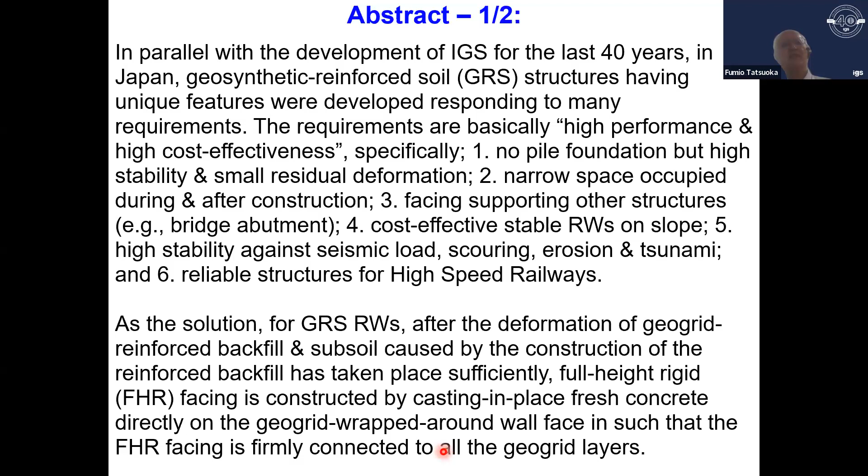Directly on the grid wrapped around the wall face, such that the rigid facing is firmly connected to all the grid layers. In the early 1990s, GRS bridge abutment was developed. One end of a simple girder is supported by a fixed bearing arranged at the top of the rigid facing of a GRS wall, or both ends of a simple girder are supported by fixed and movable bearings at the top of the rigid facing of a pair of GRS retaining walls. In total, 185 have been constructed.

Then GRS integral bridge was developed. Both ends of the continuous girder are structurally integrated to the top of the rigid facing of a pair of GRS retaining walls at the last stage of construction. 14 have been constructed. In the meantime, a number of embankments and conventional type retaining walls and bridges that collapsed due to severe seismic load, scouring, erosion, or tsunami were reconstructed as these GRS structures. After 40 years, the total wall length exceeded 200 kilometers.

Many GRS structures were constructed for high-speed railways. All of them have been performing very well, with no problematic case during and after construction, while very high cost effectiveness with low maintenance costs has been validated.

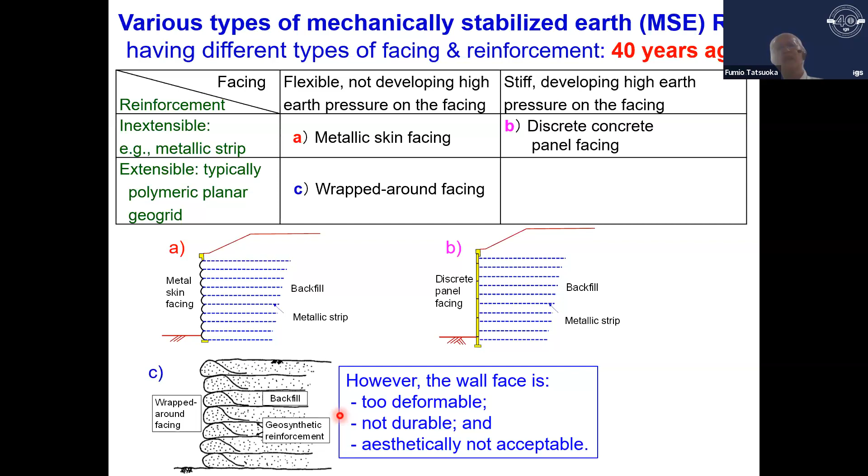This changed, moving to a discrete panel facing like this. Then with geogrid, we constructed a wrap around facing like this. However, the wall face is too deformable, not durable, and aesthetically not acceptable. So we moved to this modular block facing. This is a substantial improvement.

Yet further developments were necessary to respond to many requirements and requests. We have to go to the next step. So these are a number of problems with conventional type retaining walls: basically low performance and low cost effectiveness.

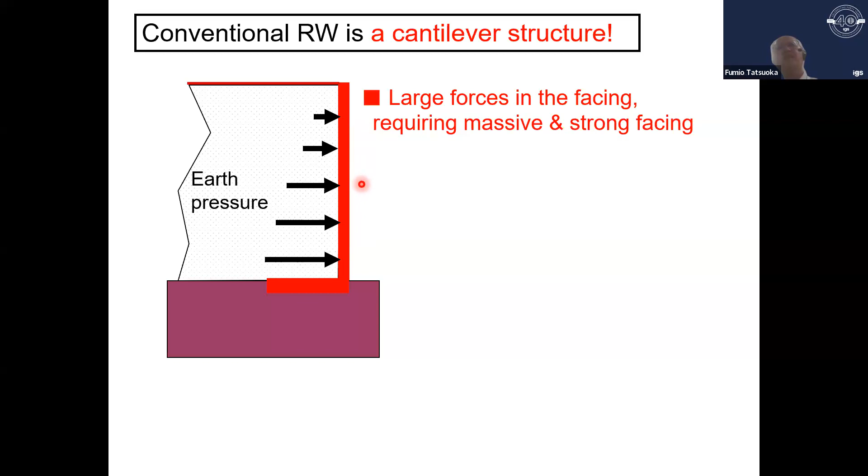Specifically, the first problem is the need for a costly pile foundation to ensure sufficient stability. This is because conventional retaining walls are cantilever structures, so we have large forces in the facing requiring a massive and strong facing, a large overturning moment, and large lateral thrust load at the facing base. This results in unstable behavior, particularly under severe seismic loads, with large stress concentration at the facing base, so usually we need a costly pile foundation.

This is one example in Japan. This is very soft clay, very thick, so we need a retaining wall. When we construct a cantilever retaining wall, we need a very long pile, but this is utterly not cost effective.

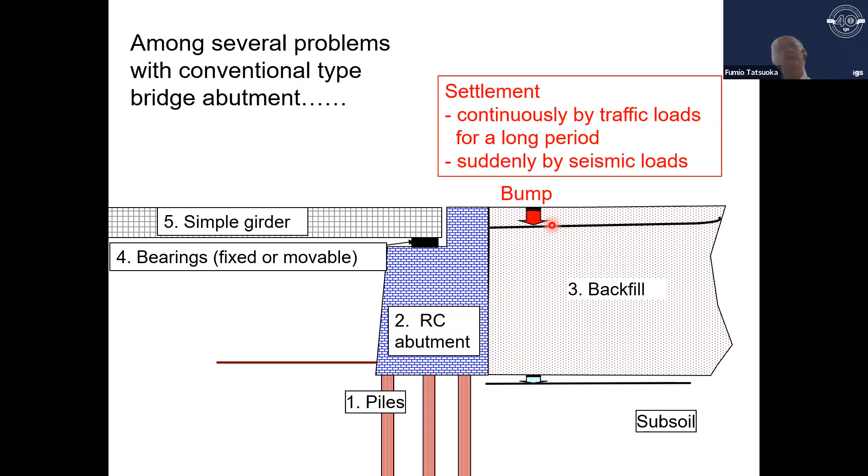The second problem is that we may have too large post-construction deformation settlement. So we have many problems with conventional type bridge abutment. One problem is the bump caused by continuous settlement. This may take place continuously due to traffic loads over a long period, or suddenly due to a seismic load. This is a bump caused by a seismic load.

You can see there's a settlement in the backfill. We have numerous similar cases. This is another case from the January 17, 1995 Kobe earthquake. So here's the railway, and you can see a settlement here, creating a bump.

Furthermore, Japan is congested and narrow, with frequent severe natural disasters and a strong need for renewal of many old soil structures. So the following problems should also be solved. The third one is narrow space available during and after construction.

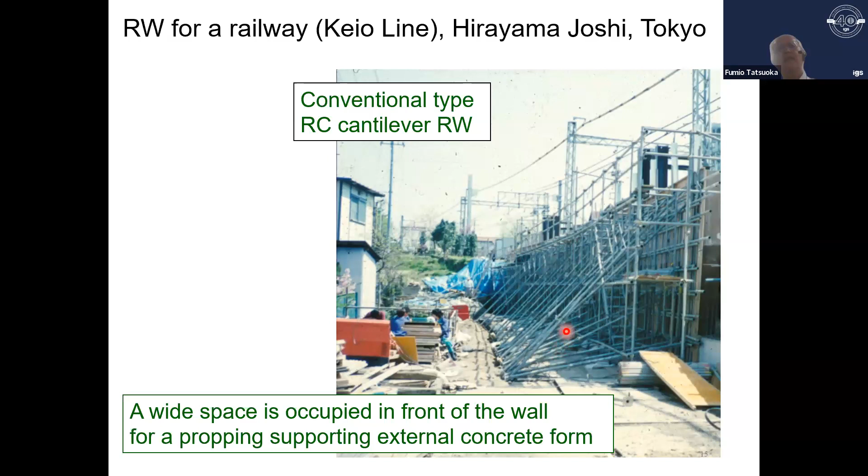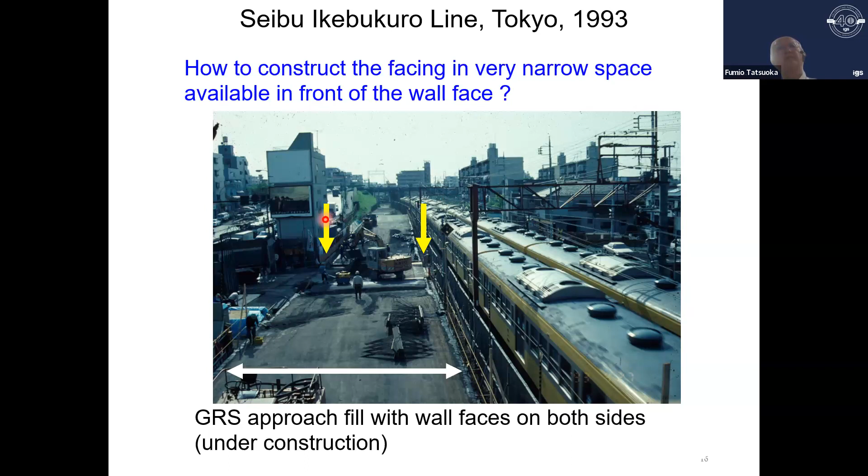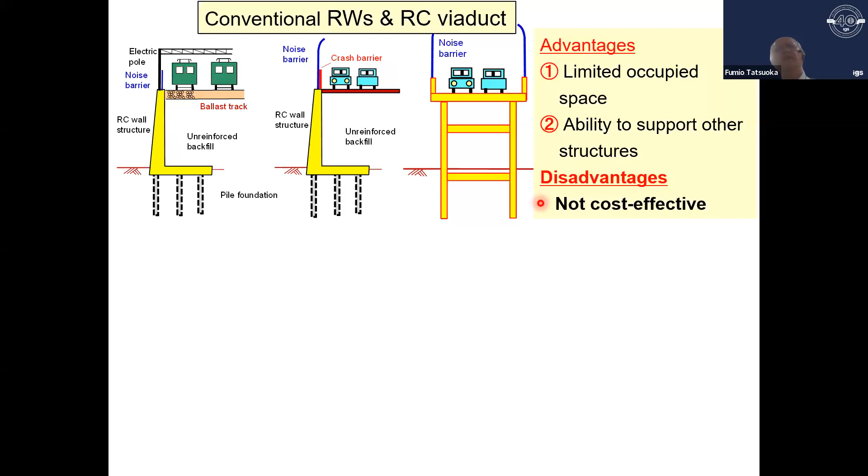So this shows a number of serious problems with conventional type bridge abutment. First, we construct many piles, then a massive RC abutment, then we construct the backfill, then earth pressure and settlement and lateral flow of the subsoil occur due to construction of the massive backfill. We may have negative friction or bending moment of the piles. And we place bearings, fixed or movable, which is costly for construction and also for long-term maintenance.

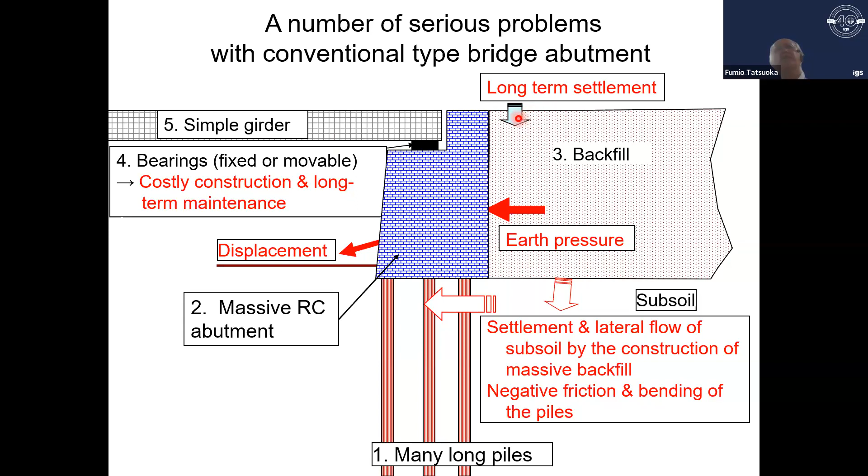Then we place a simple girder, and then we have long-term settlement. In general, we can say this is low performance and cost ineffective.

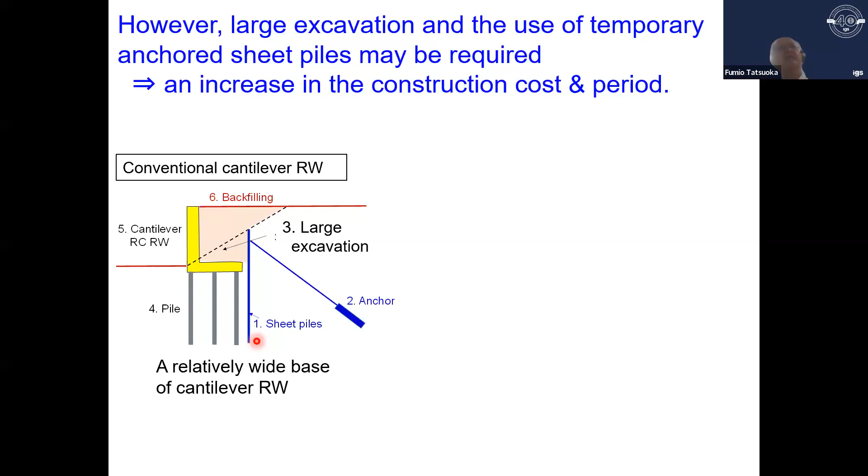The fifth problem is cost-ineffective construction of a stable retaining wall on a slope. So we need a vertical wall in this case to widen the crest of the embankment without occupying the space in front of it. However, with a conventional cantilever retaining wall, we need a large excavation and the use of a temporary anchored sheet pile. This will result in an increase in construction cost and period.

When we construct an MSE retaining wall having a facing of discrete panel or modular block, this is more cost effective, but their grid length to wall height ratio is usually larger than 0.7, or 70%, for sufficient wall stability. Then we may need a large excavation. So we have a number of similar cases.

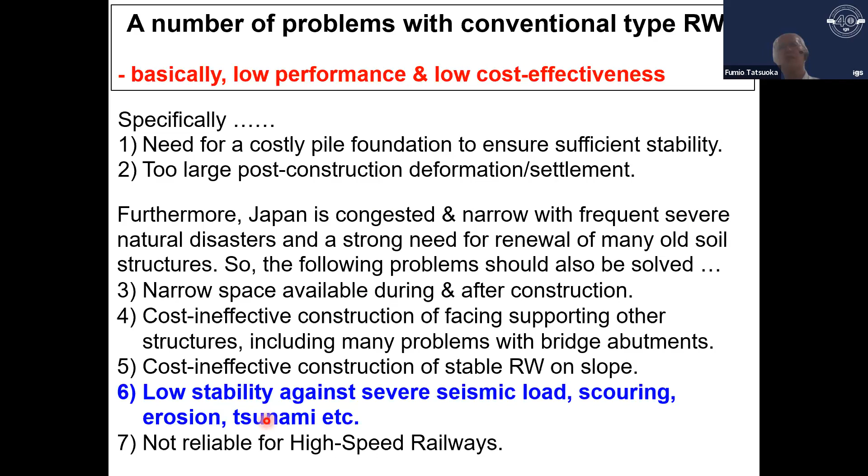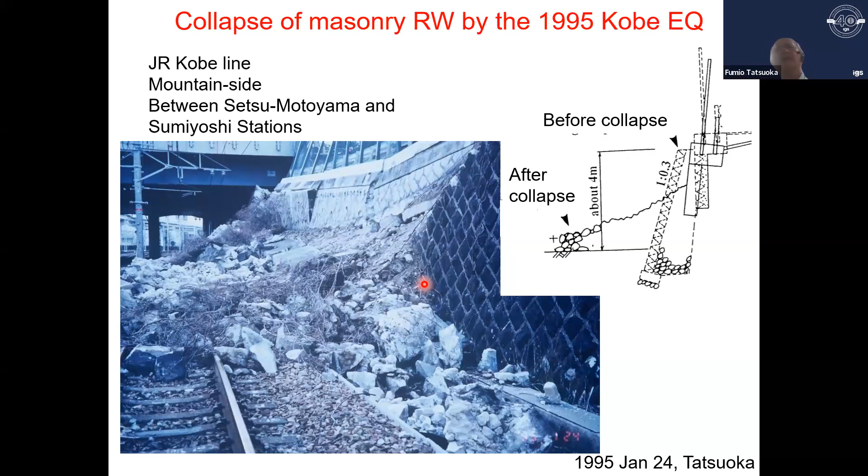This is the collapse of another type of gravity type retaining wall. So overturning failure took place despite a seismic design being performed using KH=0.2 with an allowable lower limit safety factor equal to 1.5. This means conventional seismic design is not sufficient. We also need a more stable wall.

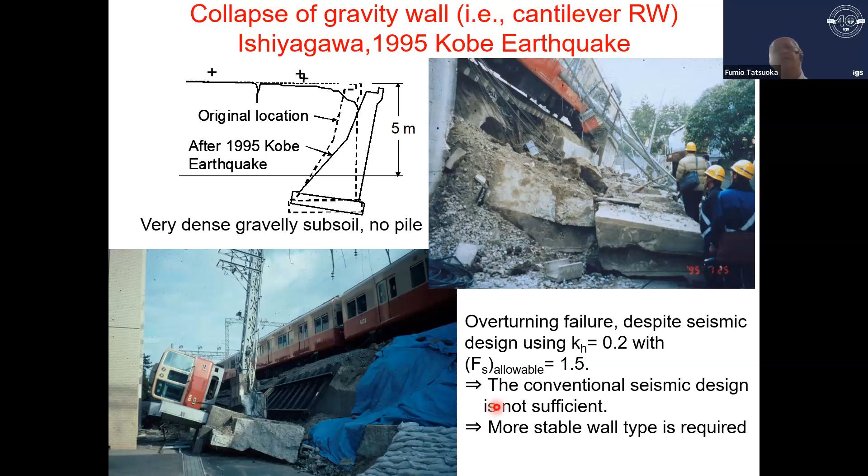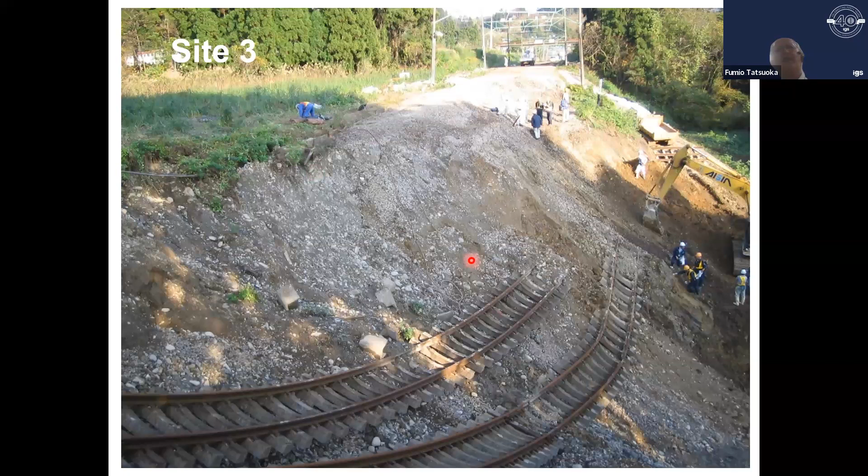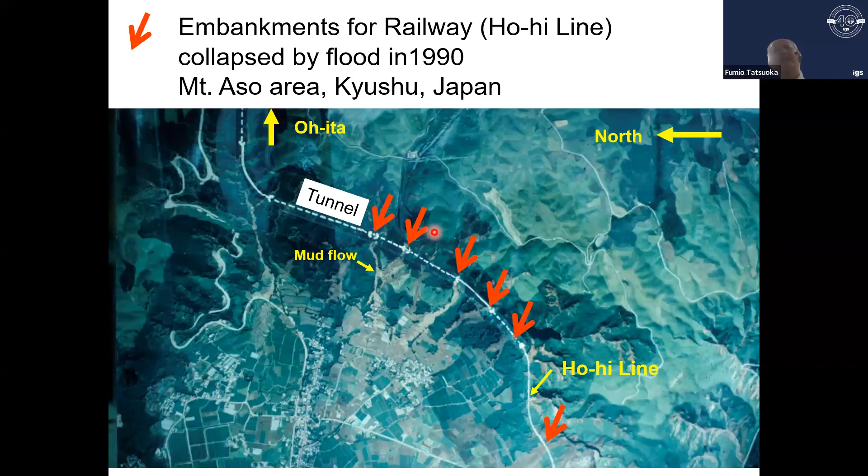So this is showing a railway in the mountain area; broken lines are tunnels, and the red arrow means the embankment for the railway. This collapsed by floods in 1990, like this. Here's a tunnel, and the embankment totally disappeared. A small diameter drain pipe was crossing the embankment. This was clogged by flowing timbers. Then a natural reservoir was formed. Then the embankment was fully eroded by overtopping flood. And here's a view of this tunnel exit on the right side and left side.

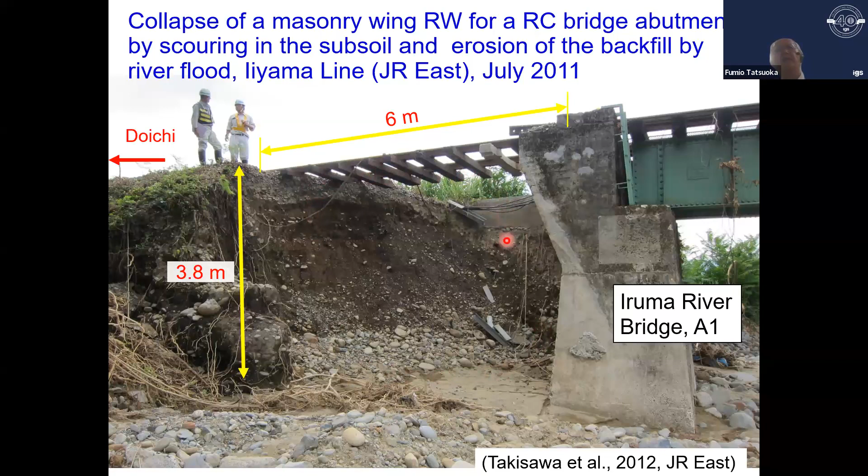This is a typical case, collapse of a gravity-type sea wall for a length of 1.5 kilometers by ocean waves during a storm in 2007, close to Tokyo. In front of the wall, about a 100 meter wide sand beach disappeared due to erosion by coastal current during the last 60 years since the completion of this road, which resulted in frequent direct attack of storm ocean waves to the wall.

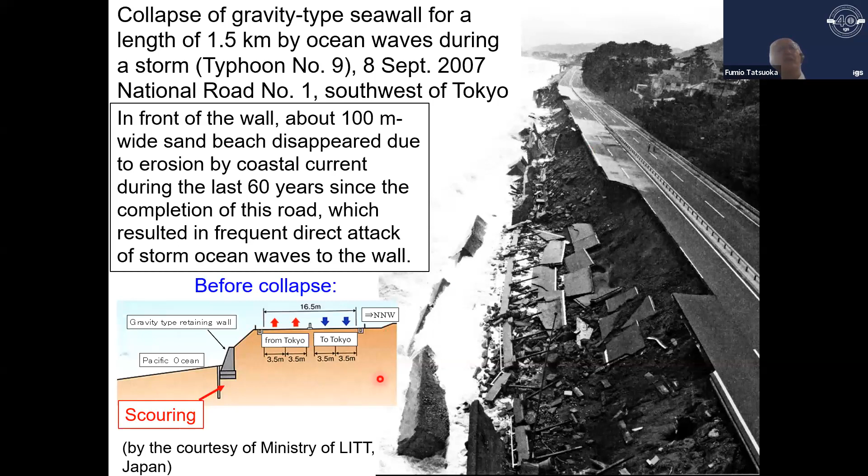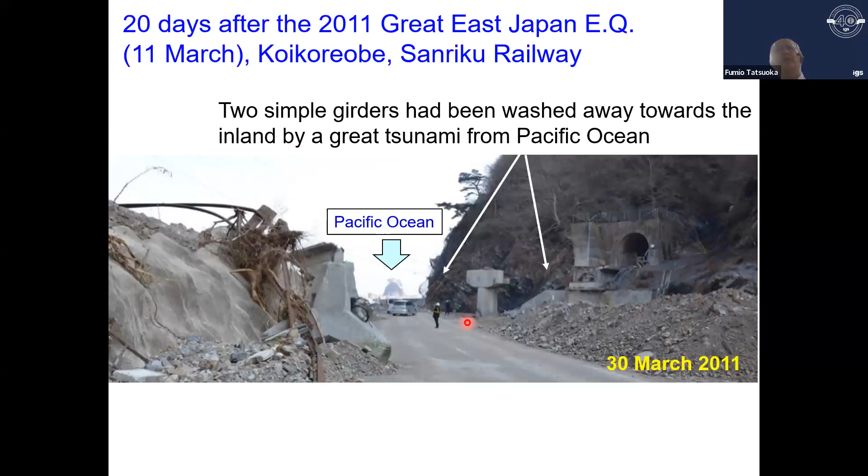So this is during the same earthquake, here in the Pacific Ocean; two simple girders have been washed away toward inland by a great tsunami from the Pacific Ocean. So as a result, these structures are not reliable for high-speed railways. So for the last 40 years, continuous efforts were made to develop the GRS structure that can alleviate these problems.

The solution is by three technical breakthroughs. First is the use of full-height rigid facing, for a change from a low earth pressure to high earth pressure on the facing, and from the facing as a secondary non-structural component to the facing as a primary structural component.

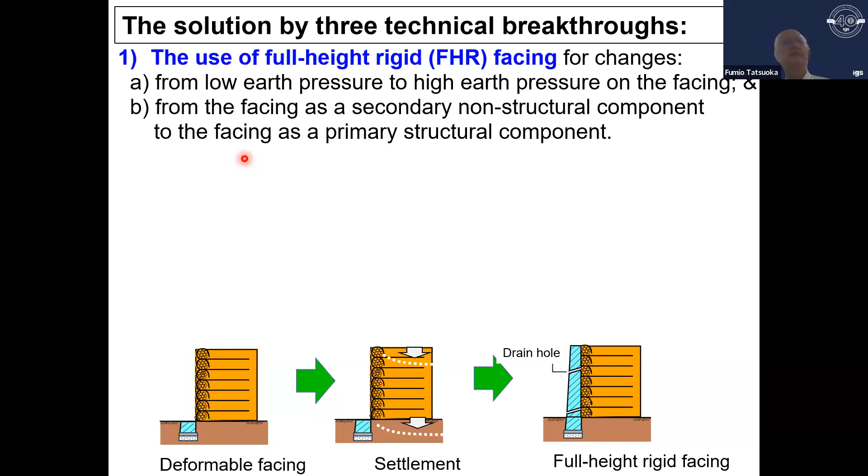Second is the structural integration of the full-height facing to the reinforced backfill, and the girder to a full-height rigid facing, with GRS integral bridge. For a change from a statically determinate but unstable structure to a statically indeterminate but stable structure.

Third is staged construction like this, for a change of construction sequence from the facing before the backfill to the facing after the backfill. So then we reached this full-height rigid facing after 40 years. So why is this solution relevant? Some reasons. So I will explain this in two terms.

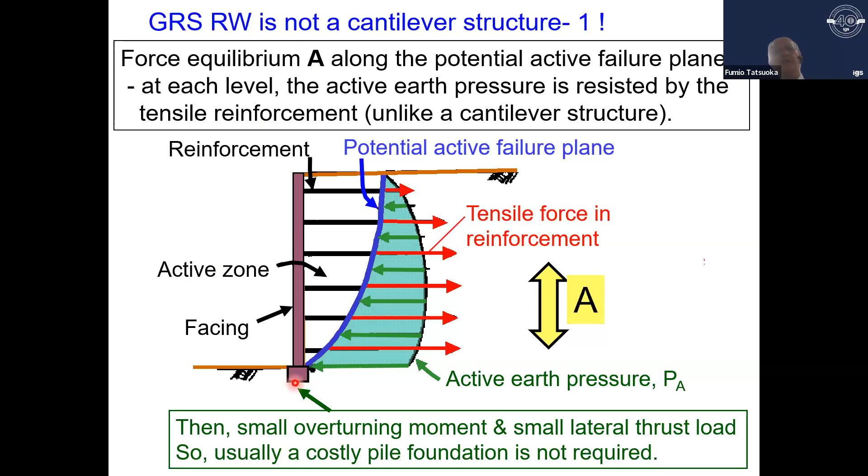So a GRS retaining wall is not a cantilever structure. So force equilibrium along the potential active failure plane is important. At each level, active earth pressure is resisted by the tensile reinforcement. This is unlike a cantilever structure. Therefore, a small overturning moment and a small lateral thrust load. So usually a costly pile foundation is not required.

However, when the facing is flexible, we have a very low earth pressure on the facing, which results in low tensile forces in the reinforcement, in particular at low levels. In the active zone, we have low confining pressure, therefore low strength and stiffness of the backfill, so large wall deformation and low stability of the wall.

On the other hand, when the facing is firmly connected to the reinforcement, we have a high earth pressure on the facing, which results in high tensile forces in the reinforcement, even at low levels. Then in the active zone, high confining pressure and therefore high strength and stiffness of the backfill. So we have a small wall deformation and high stability of the wall, even immediately behind the facing. Right?

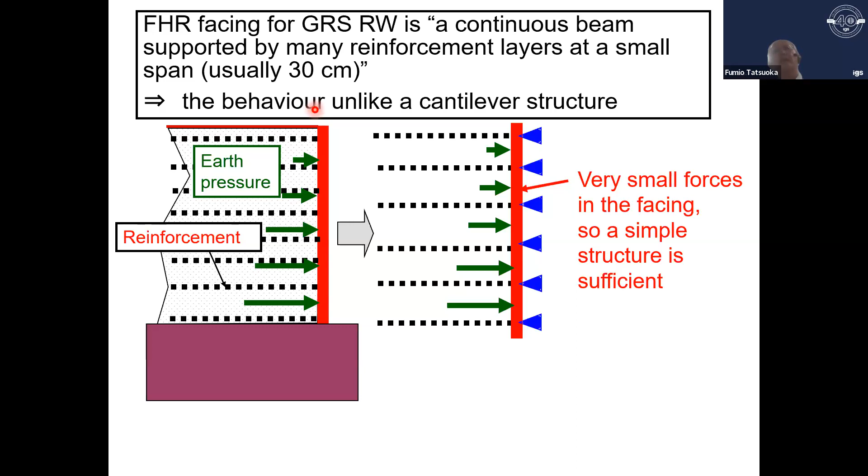So the full-height facing for a GRS retaining wall is actually a continuous beam supported by many reinforcement layers at a small span, usually 30 centimeters. The behavior becomes unlike a cantilever structure. There is a small force in the facing and a small overturning moment and small lateral thrust load at the facing base. So a pile foundation is not required and the wall becomes stable even against severe seismic loads.

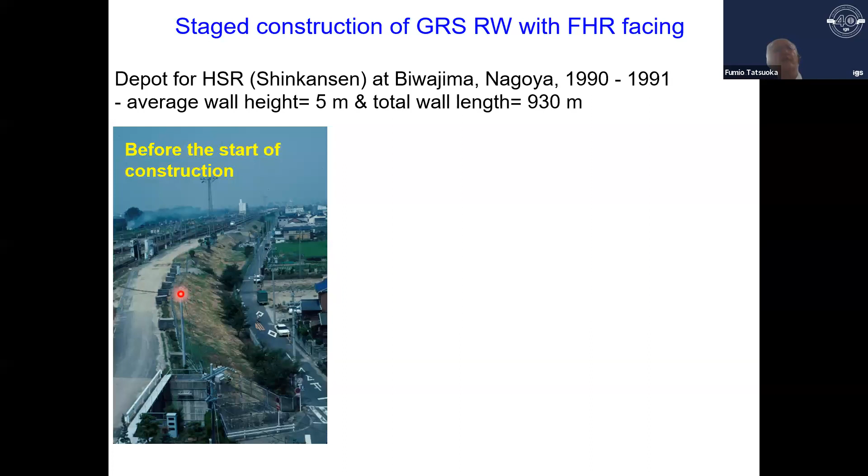So the third point is the staged construction. This is showing before the construction, the reconstruction of the slope face. This is the complete GRS wall, but before the construction of the full-height rigid facing. And this is the completed GRS wall after construction of the full-height rigid facing. This is the typical case. So in staged construction, first is the start of construction.

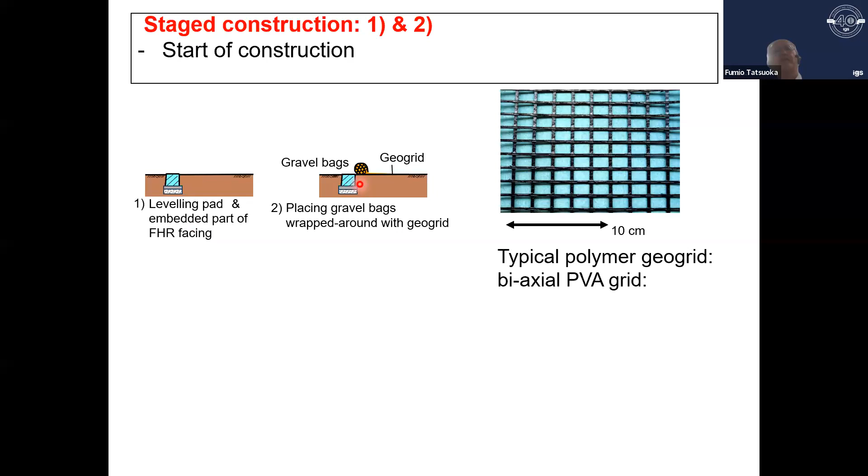Here the leveling pad and embedded part of the full-height rigid facing, and placing gabions, gravel bags wrapped around with the grid, and compaction of the first layer. Good compaction of the backfill is achieved by a small lift, 15 centimeters, ensured by a small vertical spacing, 30 centimeters, and no rigid facing existing during compaction. Besides, a small vertical spacing, 30 centimeters, results in a large contact area between the grid and backfill, and then high stability of the reinforced backfill as a composite.

Then this is the completed GRS wall, but before construction of the full-height rigid facing. Then, after compression of the backfill and subsoil has taken place sufficiently, the full-height rigid facing is constructed by casting in place fresh concrete directly on the grid-wrapped wall face. So fresh concrete enters the gravel-filled bags through the apertures of the wrapping grid. As a result, the full-height rigid facing is firmly connected to the grid layers.

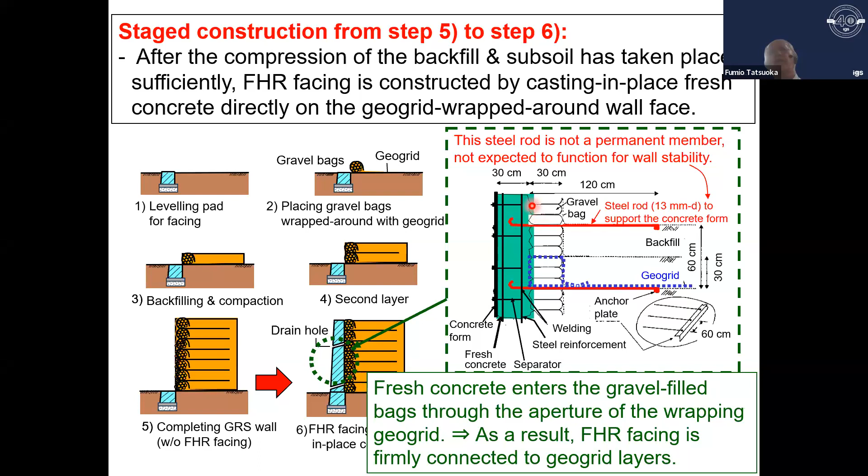So the properties required for the grid are: first, sufficient strength and stiffness with low creep deformation, and limited damage during backfill compaction; high anchorage strength in concrete and backfill, and good adhesiveness with concrete; and fourth, high long-term resistance against the high pH of concrete. Third and fourth are particularly important as the grid is in direct contact with fresh concrete like this.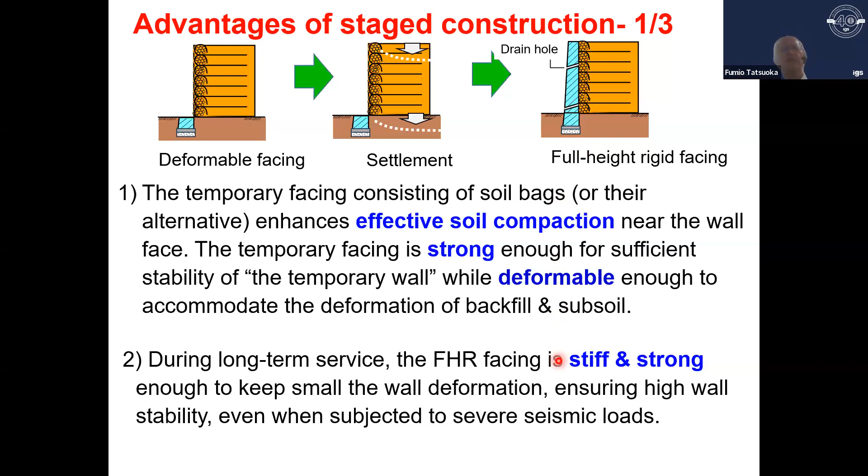And during long-term service, the full-height rigid facing is stiff and strong enough to keep the wall deformation small, ensuring high wall stability even when subjected to severe earthquake loads. And essentially no damage to the facing and the grid connection occurs during long-term service and against severe earthquake loads, because the post-construction differential settlement between the full-height rigid facing and backfill is essentially zero, and the gravel bags protect the facing-grid connection.

The last point is that the potential deformation of the backfill and subsoil has taken place before the construction of the full-height rigid facing. So a pile foundation to restrain the displacement of the facing becomes unnecessary. So when we use this GRS retaining wall at a bridge abutment, the residual displacement of the bridge girder supported by the GRS bridge abutment is kept very small despite no use of a pile foundation. I will explain this point later in detail.

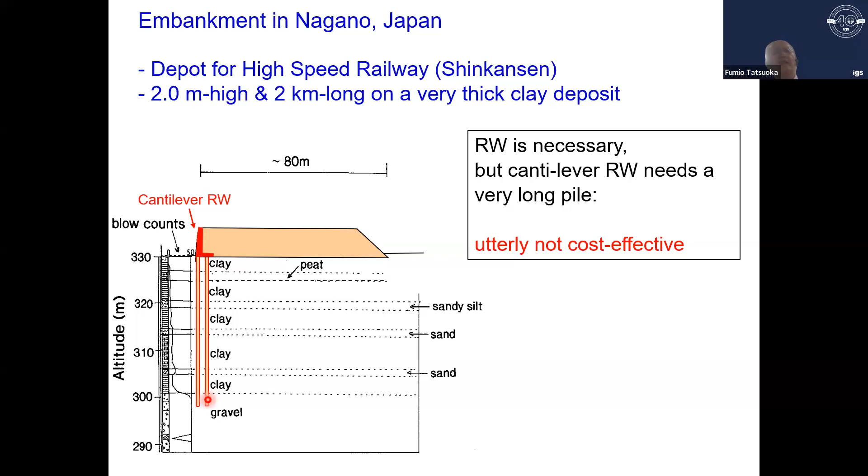So now this is an advantageous feature of GRS structures having staged-construction full-height rigid facing that alleviates many problems, for higher performance and higher cost effectiveness: first, high stability despite no use of a pile foundation, and very small post-construction deformation and settlement. In this case, for the conventional cantilever retaining wall, we need long piles. But this problem is overcome by staged construction of a GRS retaining wall without facing first, then preloading with settlement of about 1 meter, removal of the preload, then construction of the full-height rigid facing.

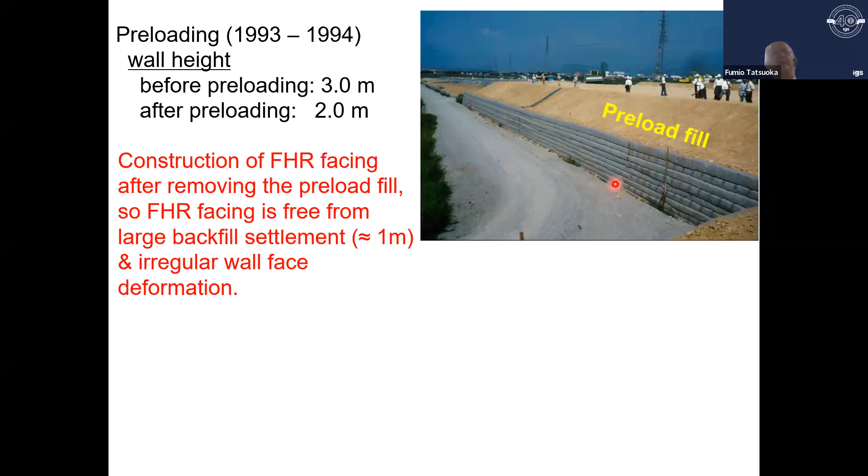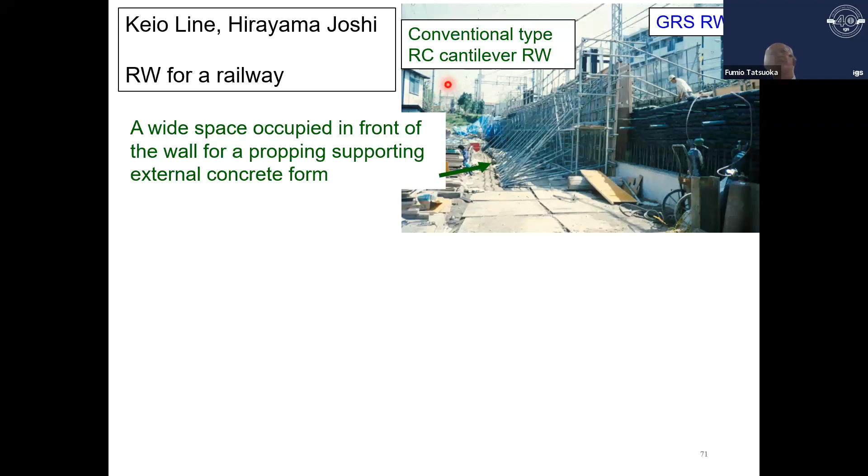So the third point is narrow space occupied during and after construction. When we construct a conventional type RC cantilever retaining wall, we need this space. But for the construction of a GRS retaining wall, here the full height facing is under construction. So this concrete form here is supported from inside of the backfill. So we don't use this space.

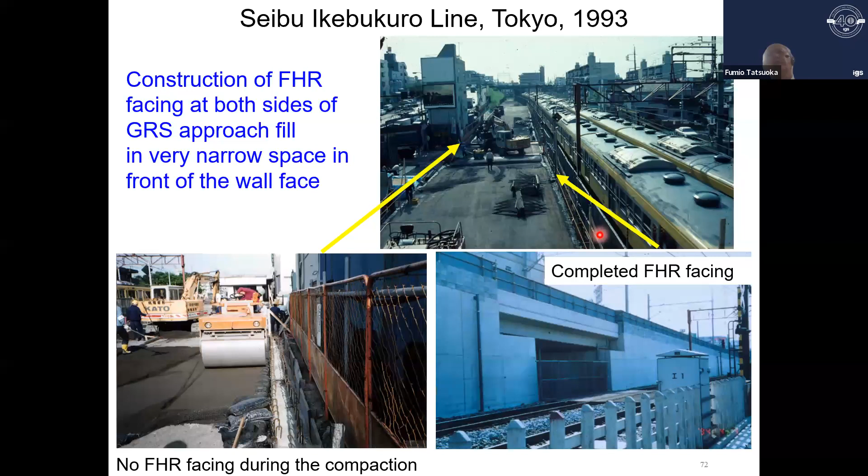In this case, here is a GRS embankment, and we need a facing here. In this place, there is no facing during construction, but facing is constructed in this space. Also in this space, GRS full height rigid facings are constructed like this, because we don't need a space in front of the wall to construct the full height rigid facing.

And the GRS retaining wall with full height facing is cost effective. This is largely by keeping the two advantageous features: limited occupied space and ability to support other structures. So here the railway or road can be arranged very close to the wall face, so the occupied space is narrow, and full height rigid facing can effectively support other structures like this, despite no pile foundation.

In this case, the full height rigid facing is supporting this electric supply structure, and the railway track is placed very close to the facing.

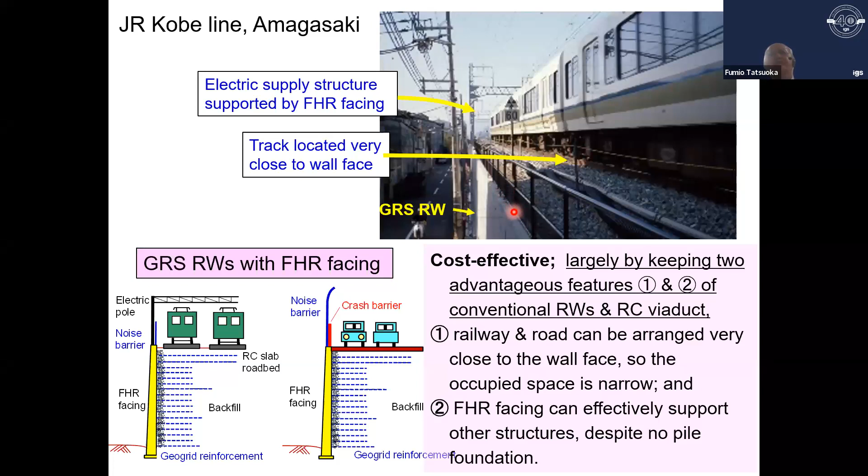And the fourth point is cost-effective construction of a stable retaining wall on a slope. When we construct a conventional cantilever, there are the problems of large excavation and anchored sheet piles. Same with this type of MSE structure. In our case, the GRS retaining wall with full height rigid facing, we use short basic geogrid layers to reduce slope excavation and not use anchored sheet piles.

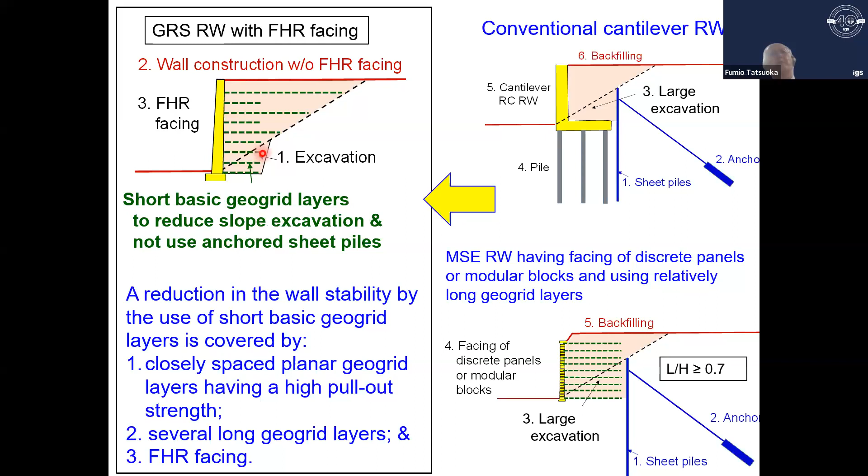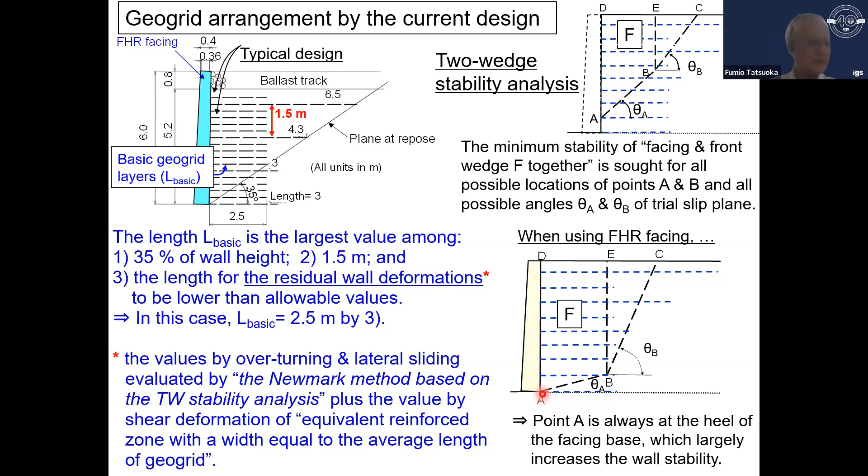When using full height rigid facing, this point A becomes here, and this makes it very stable. So the full height rigid facing can directly support other structures. So full height rigid facing and closely spaced short basic geogrid layers, together with several long layers, behave monolithically as a composite, not developing internal local failure.

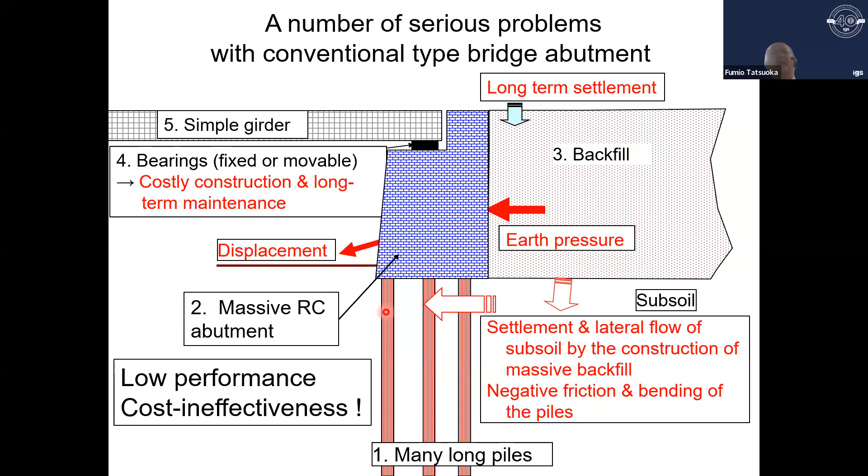So we can expect high wall stability against overturning and lateral sliding and small shear deformation when subject to static and seismic earth pressure from the backfill and external loads like this. Then we can use the GRS retaining wall as a bridge abutment. So we have a number of problems. We may have damage. The solution is this: the GRS bridge abutment is a good solution.

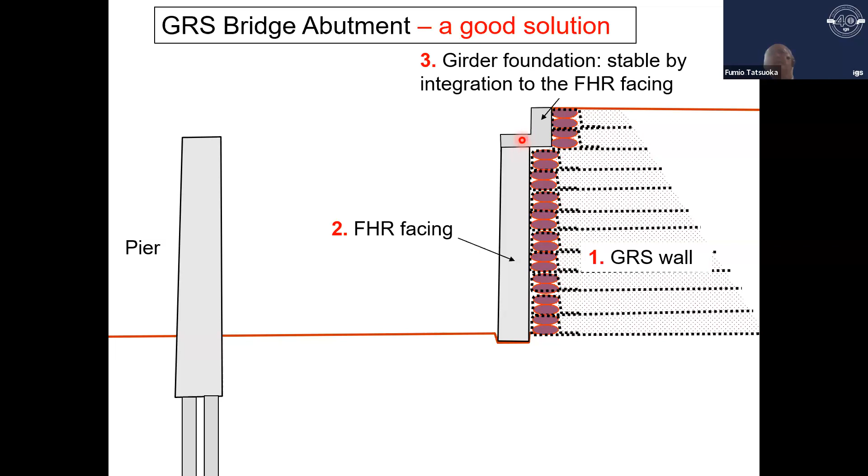So we first construct the GRS wall, the facing, and the girder foundation. This is stable because the girder foundation is integrated to the facing. So despite no use of pile foundation, we can expect very stable behavior even against severe seismic loads, and no bump here by the settlement of backfill, because the construction of the full height rigid facing is after potential deformation of backfill and subsoil has taken place.

The second is enhancement of good compaction of backfill, and third is firm connection of the facing to all the layers. So this is statically determinate due to the use of movable and fixed bearings. So the internal forces in the girder and facing are not sensitive to the thermal deformation of the girder and the post-construction deformation of the backfill and subsoil. So design of the girder and full height rigid facing is not sophisticated.

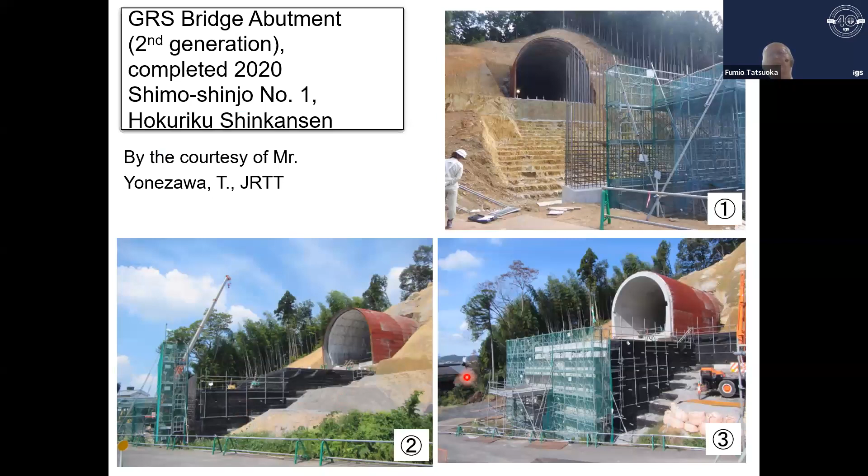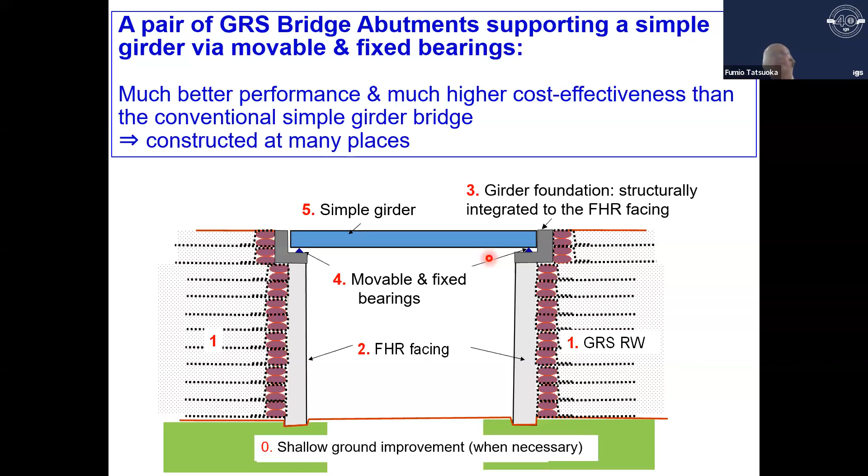So this is a pair of GRS bridge abutments supporting a simple girder by movable and fixed bearings. This has very good performance. So this is a typical case.

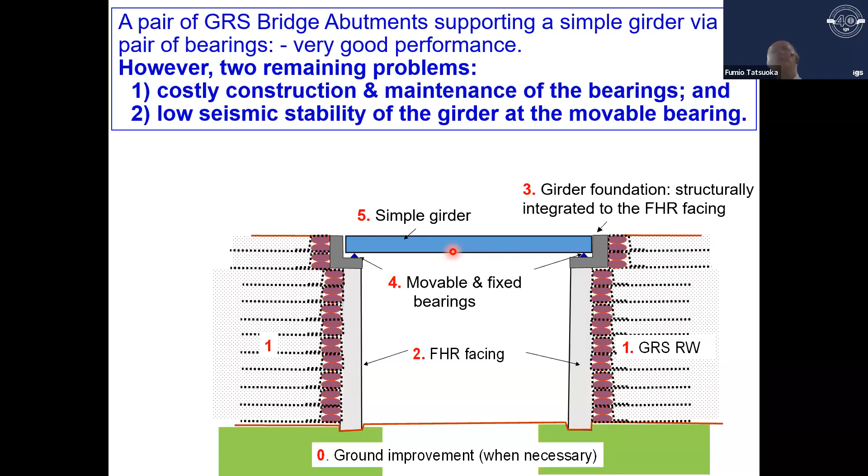One, the costly construction and maintenance of the bearings, and the low seismic stability of the girder at the movable bearing. The solution is the GRS integral bridge. A GRS integral bridge is constructed in this way. Finally, here, structural integration.

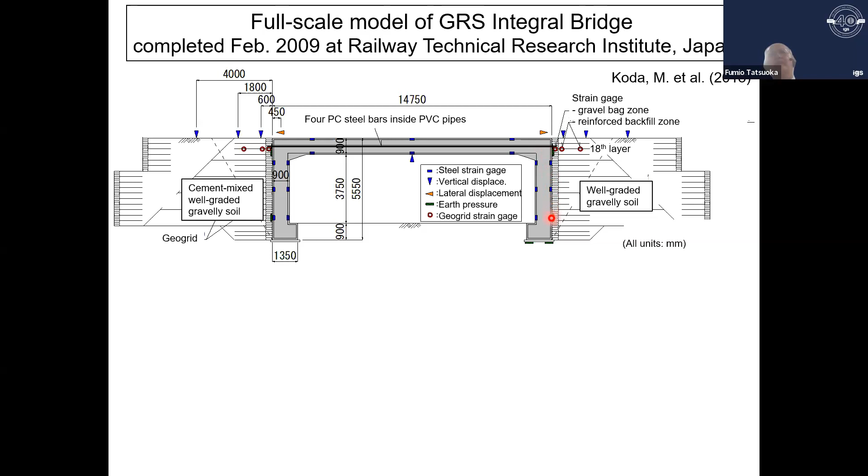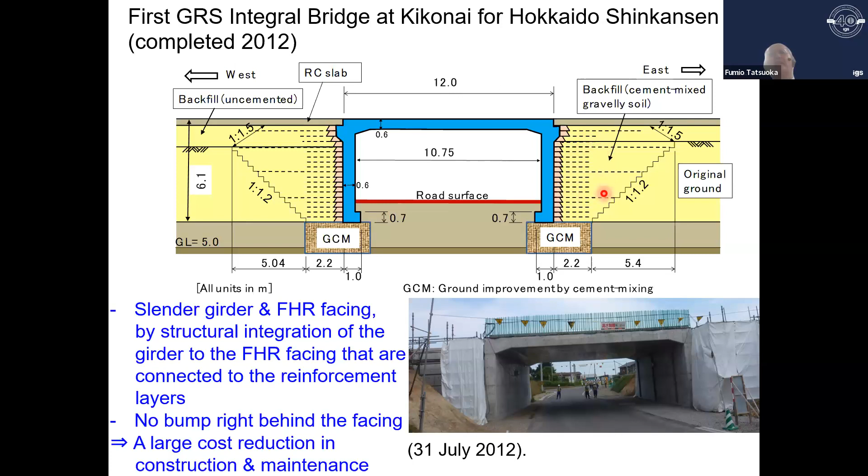Here are the 3 GRS integral bridges. The simple girder was washed away by the tsunami during the 2011 Great East Japan earthquake. So there were 3 candidates for restoration. One is a 2-span simple girder supported by 2 pairs of bearings, the same as the collapsed one. The second one is a single continuous girder, using a pair of bearings here and here.

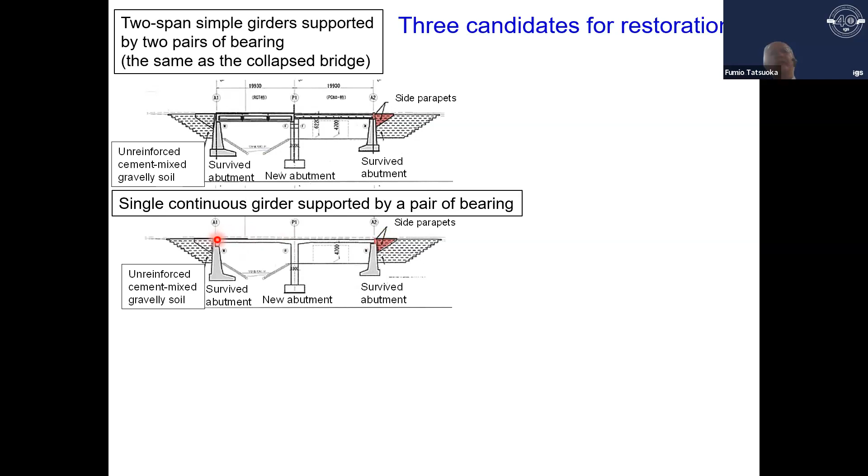The third one is a GRS integral bridge without using bearings. This is a continuous girder supported vertically at the center. So we compared the construction costs, seismic stability, anti-tsunami stability and maintenance cost. In all terms, the GRS integral bridge is the best. So this was adopted because of the best performance and the best cost effectiveness.

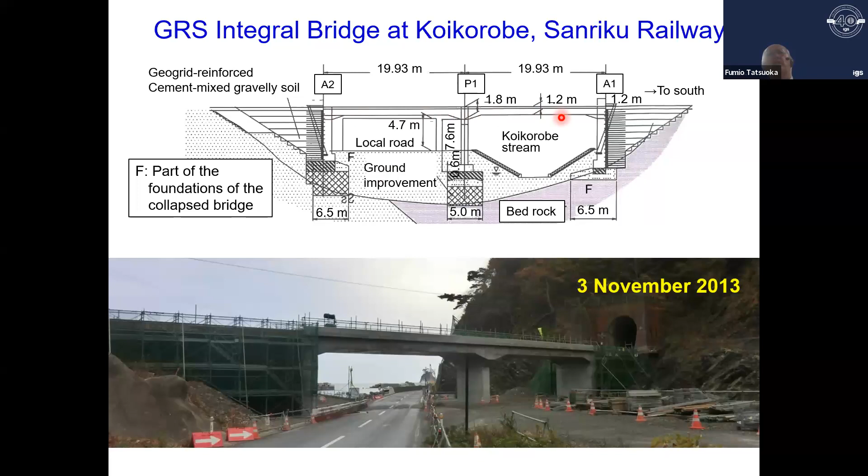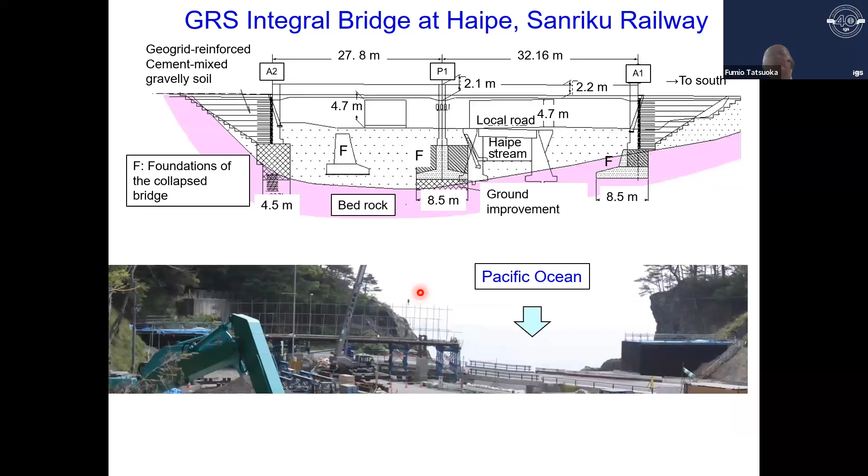This is during construction of the GRS integral bridge. The total span length is 40 meters, and this is the completed one. Another place, the simple girder was washed away by the tsunami like this. Here the total span is 60 meters. This is during construction, also like this. And this is the completed one. So it has high stability against severe seismic load and scouring and erosion by tsunami.

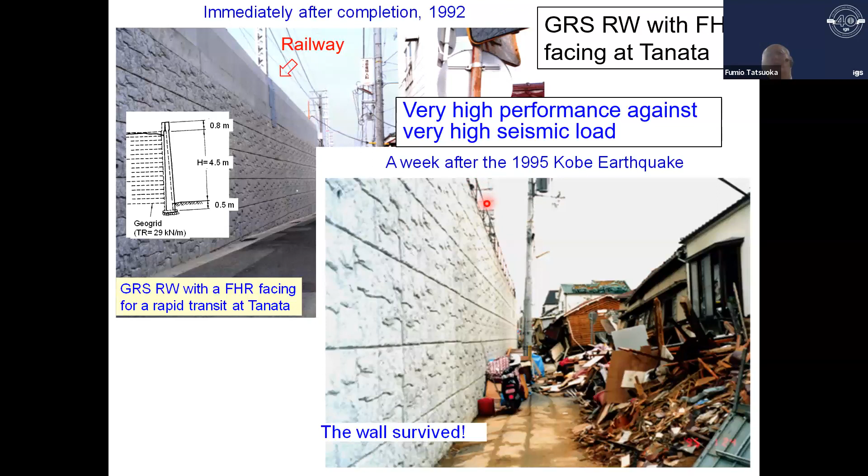So this is a GRS retaining wall, 1992. This is the same retaining wall in 1995, a week after the 1995 earthquake. So the wall survived. This is a view of the wall from the other side. And here the collapsed wall was restored to a GRS retaining wall like this. This collapsed masonry retaining wall was restored to a GRS wall like this.

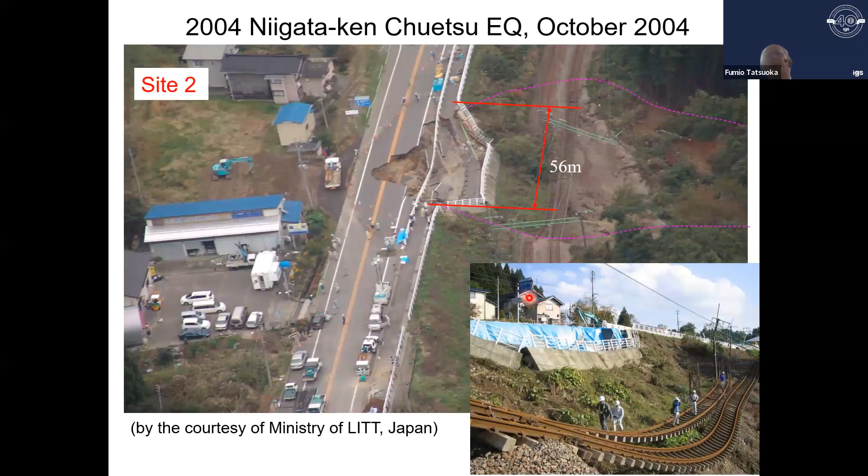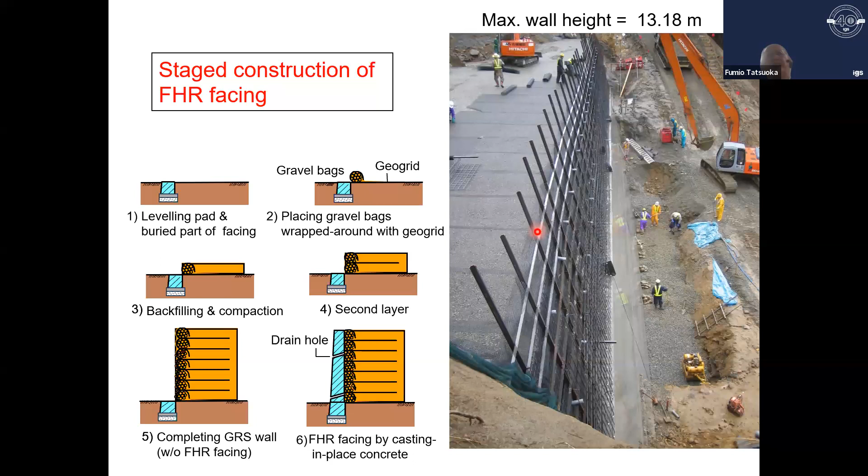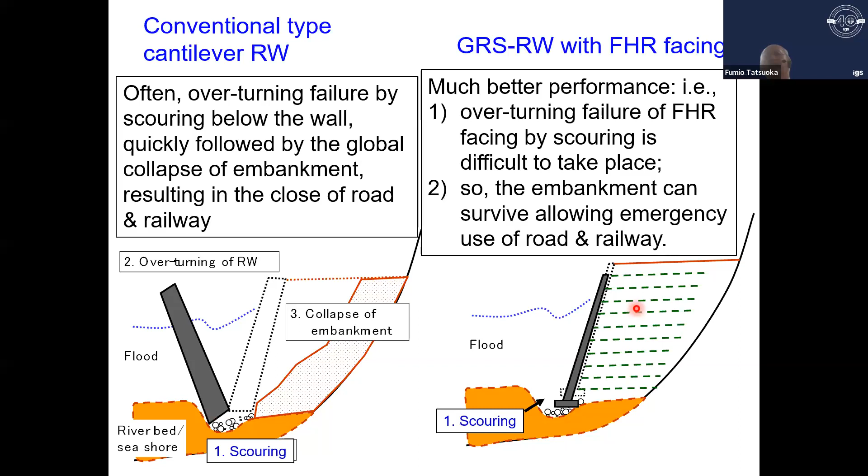Here is a collapse of a conventional type cantilever retaining wall by scouring, but a GRS retaining wall with full-height rigid facing gives much better performance, because overturning failure of the full-height rigid facing by scouring is difficult to take place. So the embankment can survive, allowing emergency use of road and railway.

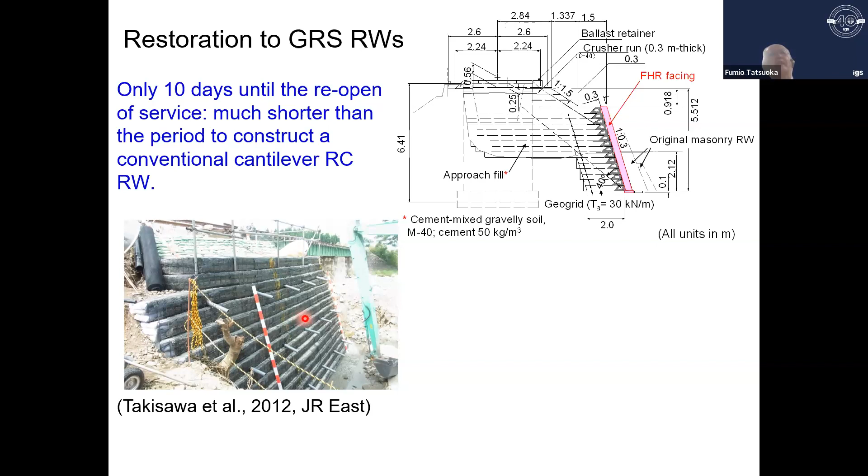So this place was restored like this. Only 10 days were required until the opening of the service. This is much shorter than the period to construct a conventional cantilever RC retaining wall. The full-height rigid facing was constructed after the opening of the service.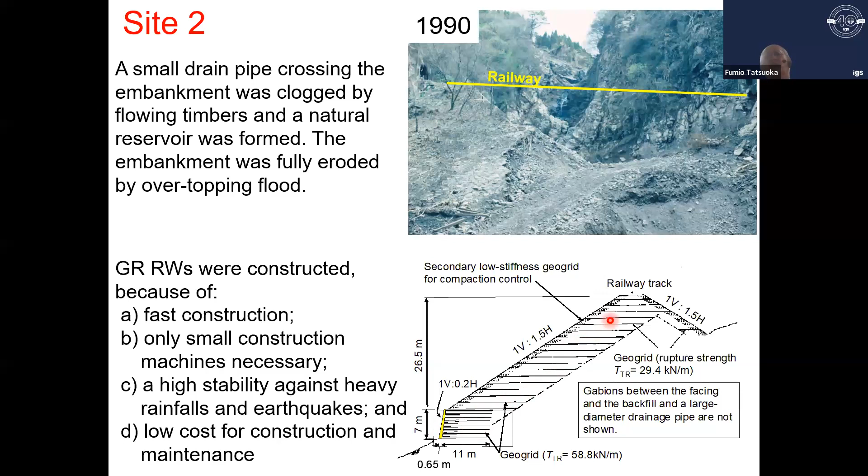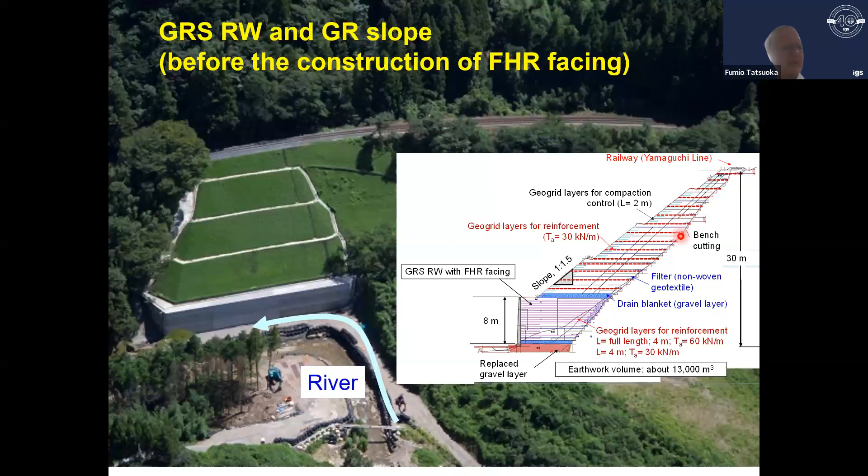At this place, the embankment disappeared, but this was restored to a GRS structure, retaining wall and reinforced slope. This is during reconstruction. This is the completed wall. This place was reconstructed to a GRS structure like this, an 8-meter wall and geogrid-reinforced slope. And this place has full-height rigid facing. This place was restored to a GRS embankment. The cross-section is this: the concrete facing is connected to the geogrid layers.

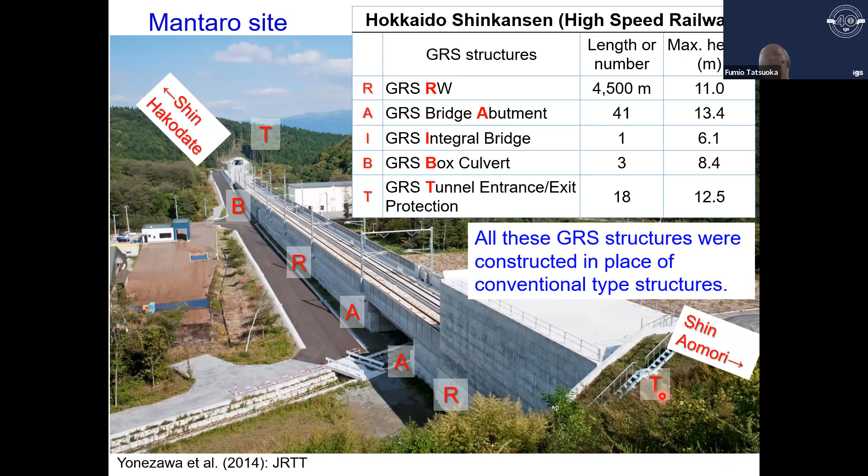So this is a close view. This is a GRS retaining wall with full-height rigid facing. This is a GRS box culvert. This is a GRS bridge abutment. This is GRS tunnel entrance and exit protection. And the GRS bridge abutment is constructed in this way.

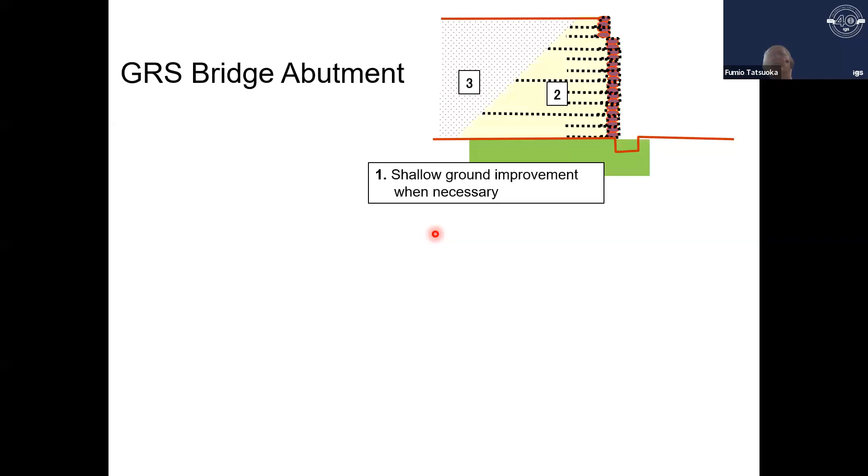Here's a completed one. Yeah, this Kyushu line opened last year. So GRS retaining wall at the depot. And in this route of high-speed railway, among 88 bridge abutments constructed at the tunnel exit, 78 are GRS bridge abutments. Here is a GRS bridge abutment here, here, here.

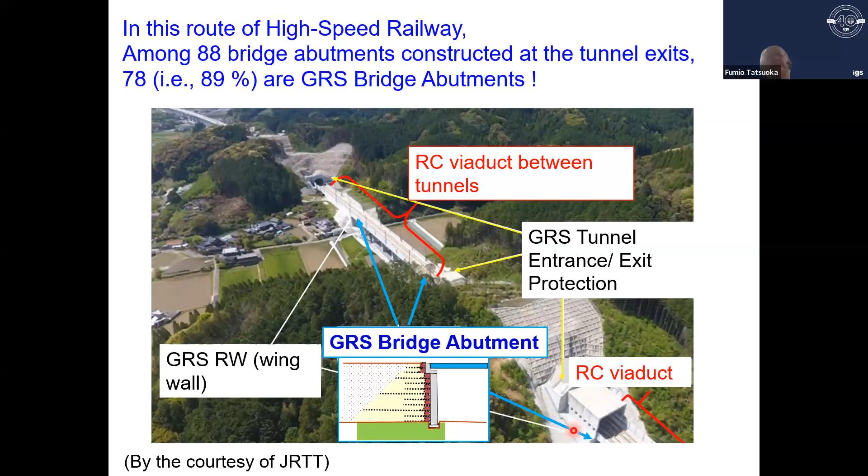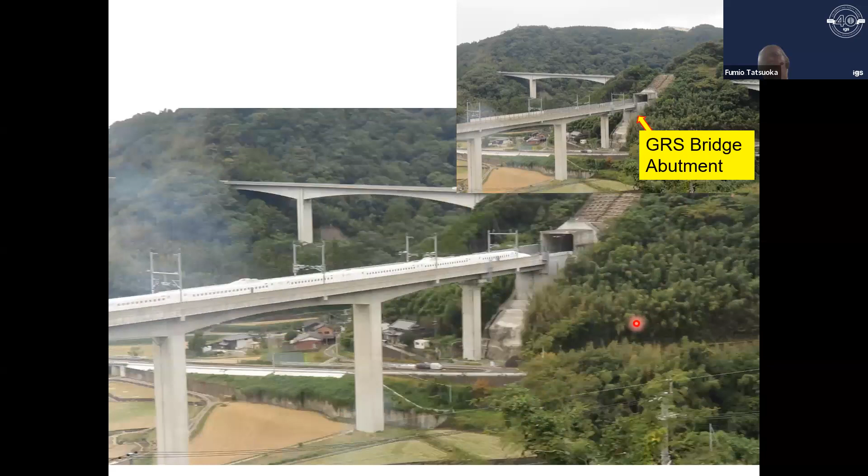This is a close view of such a case. Here's the GRS bridge abutment. This is another GRS bridge abutment. This is another case. Oh, here, this is GRS bridge abutment.

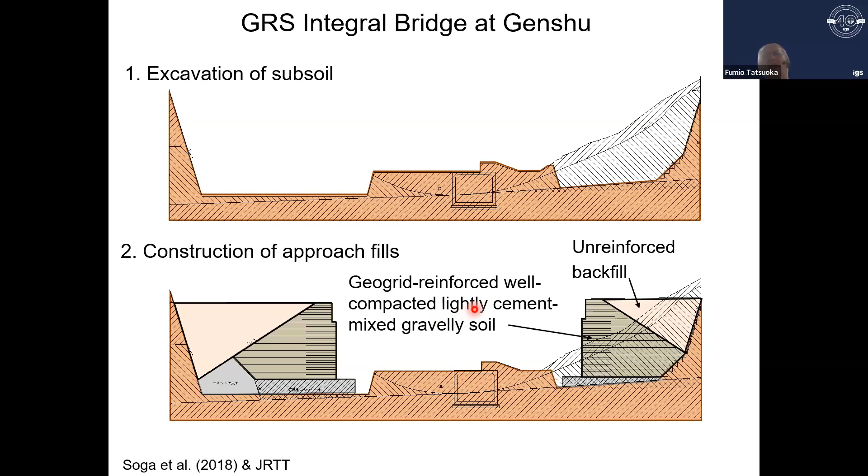So GRS integral bridge was constructed in this way: excavation of the subsoil, the construction of approach fill. So geogrid-reinforced, well-compacted, lightly cement-mixed gravelly soil here. This is unreinforced backfill. Then the construction of full-height rigid facing after deformation of the backfill and subsoil has taken place sufficiently. Then full-height rigid facing is firmly connected to the grid layers.

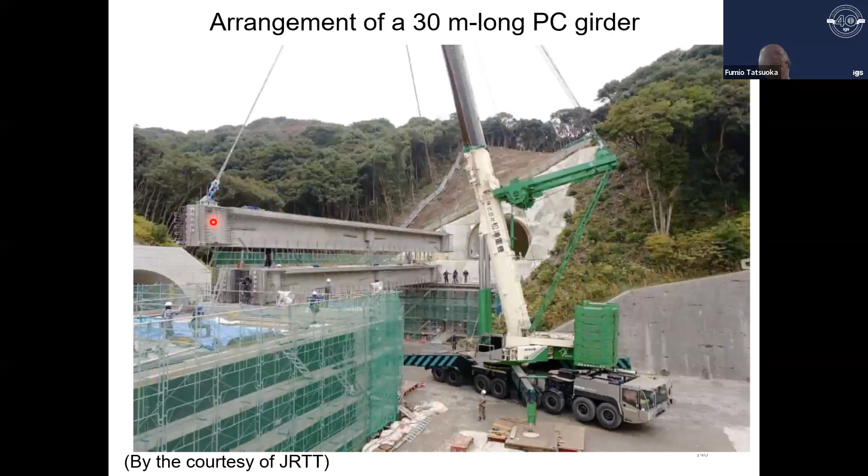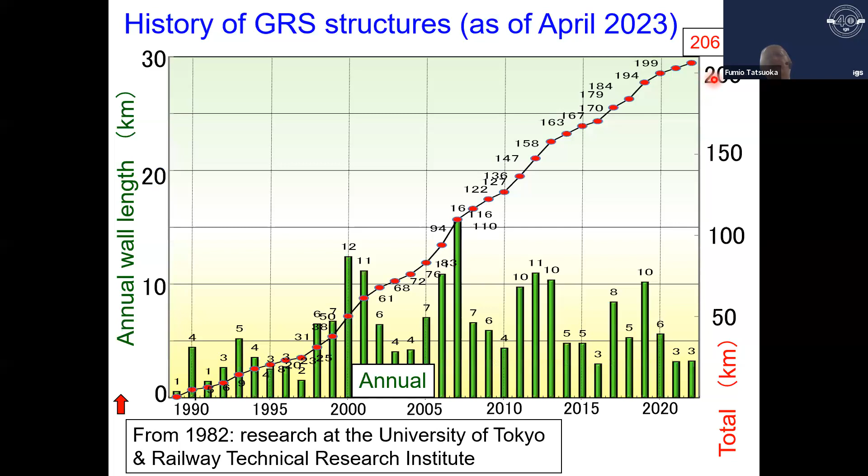This is showing the history of GRS structures. Every year, this length has been constructed, in total 206 kilometers. And during this period, here the restart of construction of new bullet train, high-speed railway, and we have a number of earthquakes here. So we have learned a lot of lessons. This is showing the location of completed GRS retaining walls with full-height rigid facing, GRS bridge abutments, and GRS integral bridges. Total completed wall length is 206 kilometers. Total number of sites is 1,424. So far, we had no problematic case during and after construction in all these projects.

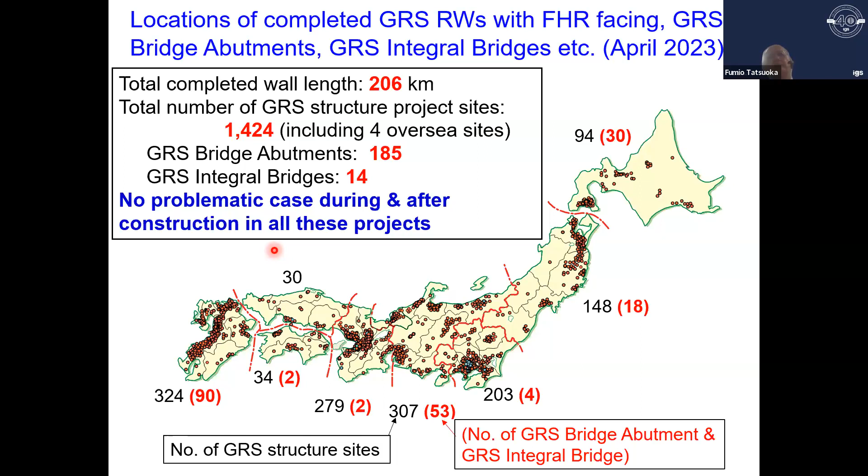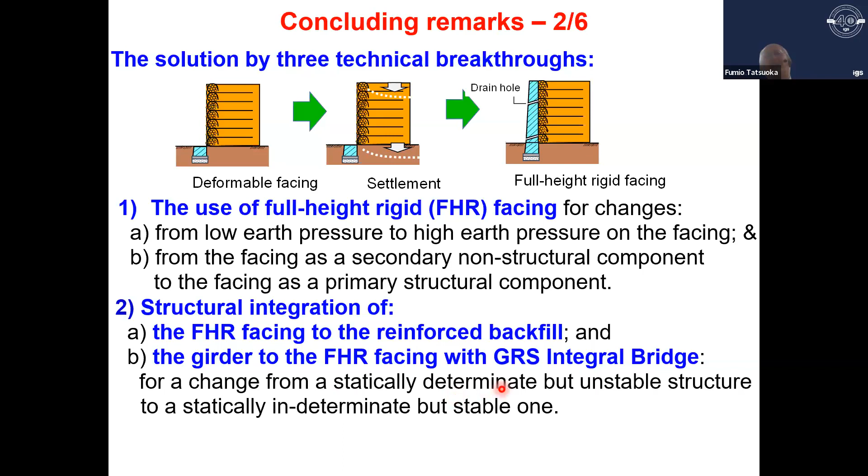Second, the structural integration of the full-height rigid facing to reinforced backfill and the girder to full-height rigid facing with the integral bridge, for a change from a statically determinate but unstable structure to a statically indeterminate but stable one. The last is staged construction, or change of construction sequence, from facing before the backfill to facing after the backfill.

So a number of GRS retaining walls with full-height rigid facing, GRS bridge abutments, GRS integral bridges, etc., have been constructed as important permanent structures for total wall length more than 206 kilometers, many of them for high-speed railways. This accomplishment is due to high cost performance by high performance during long-term service and against severe seismic load, heavy rainfall, strong flood, and tsunami, and low cost for construction and long-term maintenance.

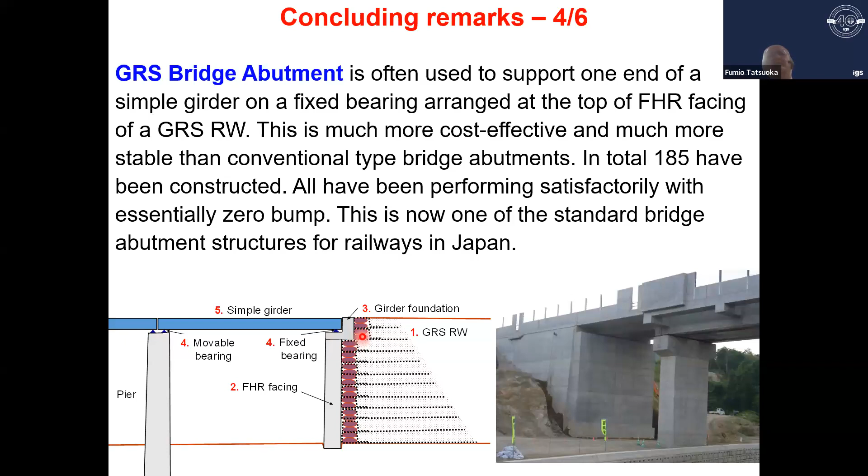The GRS bridge abutment is often used to support one end of a simple girder on a fixed bearing arranged at the top of full-height rigid facing of a GRS retaining wall. This is much more cost-effective and much more stable than conventional type bridge abutment. In total, 185 have been constructed. All have performed satisfactorily with essentially zero bump. This is now one of the standard bridge abutment structures for railway in Japan.

GRS integral bridge consists of a continuous girder of which both ends are structurally integrated to the crest of the full-height rigid facing of a pair of GRS retaining walls, not using girder bearings. This is much more cost-effective and much more stable than conventional simple girder bridge. In total, 14 have been constructed. GRS integral bridge is now one of the standard bridge structures for railway in Japan.

The last is that many of the conventional type embankments, retaining walls and bridges that collapsed by recent severe seismic load, heavy rainfall, strong flood, high ocean storm waves, tsunami, etc., were restored to GRS structures having full-height rigid facing like this.